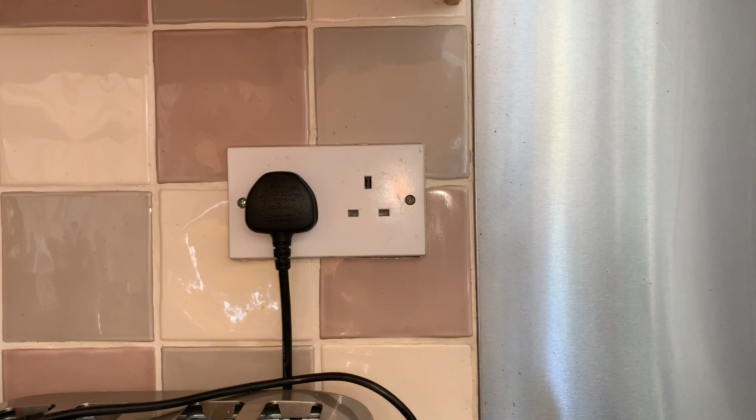First of all, we find a live supply which we know is working. This is a live supply, there's no switch on there. I'm now going to switch on and test to make sure this is working. You can see that's picking up the live, the neutral, that's the earth, that's the live, that's the neutral. So we know now it's working.

So we can go to all the appliances. The hob is just in front of us here, which is metal, so we could get electrocuted. We can now check and see whether we get electrocuted from that, which no, and now we need to check and make sure this is still working, which it is.

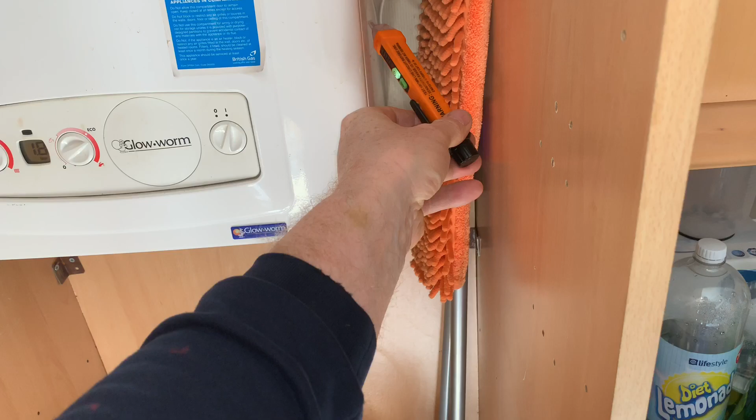Across from the kitchen we've got a boiler, so we can now check the boiler. That's not picking anything up, that was just me doing that. Okay, we can now go back to our known supply and check again.

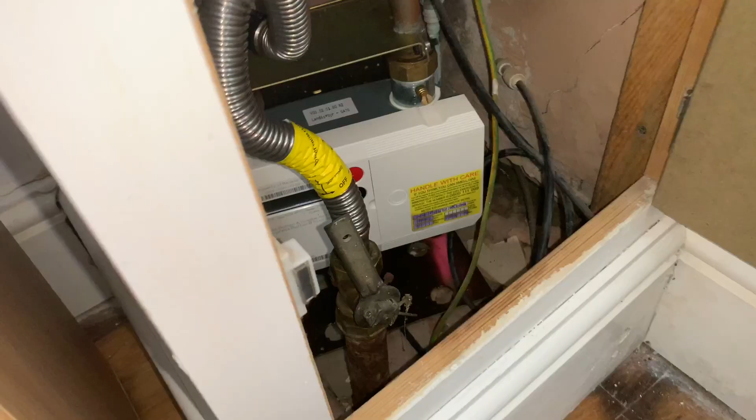The last appliance we've got in the living room is the fire, which I don't think you ever get an electric shock from, but you never know. So we now need to go back to a supply to check - and that's working. Now we need to go to the gas meter to check it.

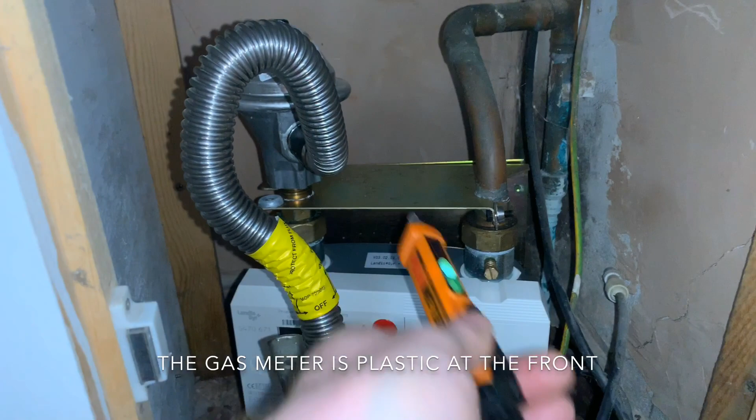That's plastic, that's not going to beep. So we can now see we've got no power there. We need to check again. Now we know we're safe to touch everything.

The first thing we're going to do is a visual inspection of the meter. We're looking for: is there a bracket and is this meter secured? Have the shear bolts been sheared on the anti-tamper devices? Does the ECV fall to off? Are there labels on the meter and on the anaconda? Is the anaconda not stretched? Are there no signs of corrosion? And is the earth bonding to the correct regs?

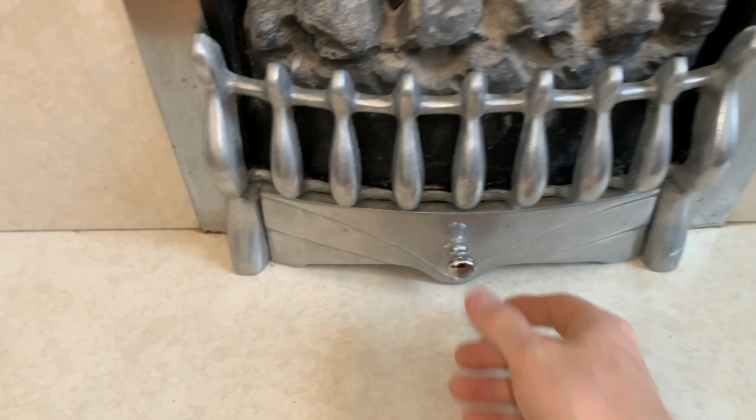Now the first thing we need to do is make sure the appliances work before we even turn the gas off. So let's try this fire first - let's remove the cover and expose the igniter. Well, that didn't ignite. Looks like the igniter doesn't work. No, the igniter's not sparking, and that looks in pretty poor condition, so it's a good job we're servicing it.

So first of all, that doesn't work. Let's go and try the hob. Okay, there's the hob, let's give it a try. Well, at least we know we've got gas. Okay, so that's all working.

Ignition works - we need to do all the rest of the checks, but we're just checking to make sure they work. Next, let's go to a hot tap and turn it on to see if the boiler fires up, which it has done. So the boiler works. Okay, time clock and stuff - can't see a time clock anywhere, so we'll have to look at that. But at least the boiler comes on, that's the main thing.

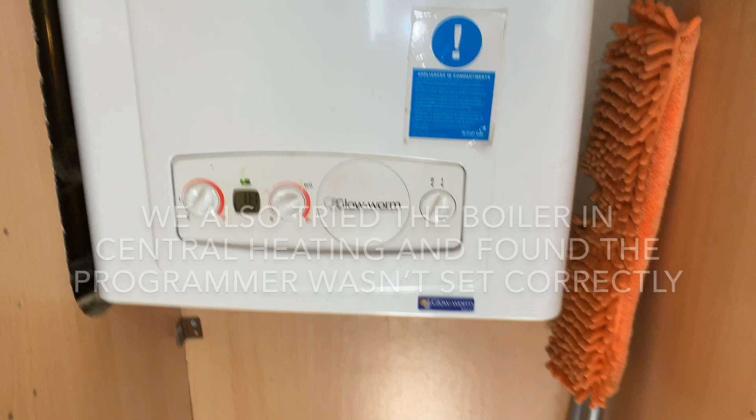Okay, so we'll go through the service procedures for all the different appliances now.

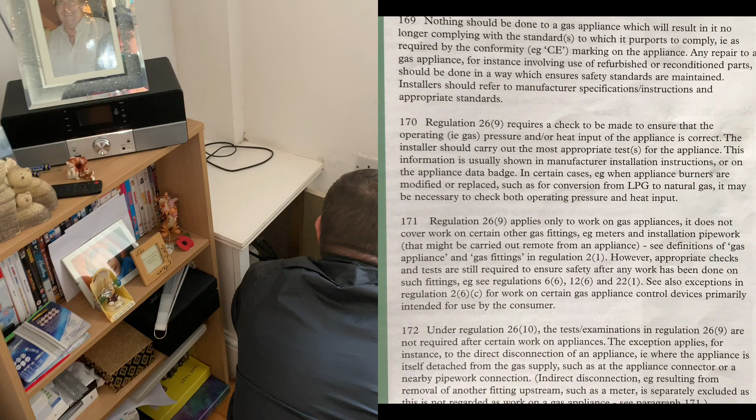According to regulation 26.9 of the Gas Safety (Installation and Use) Regulations, we don't need to carry out a tightness test when servicing, but we've got trainees here and we always carry out a tightness test. Mark has done his visuals on the meter, noted all his faults, and he's now carrying out the tightness test procedure. We'll do a tightness test before and after, so we know there are no leaks before we work and no leaks after. Even though the regulation says we don't need to do one, we are doing them. So that's the end of the tightness test, and as you can see from the results, there's no leak.

So first thing we're going to do now, we know this fire's ignition isn't working. I'm going to take the coals off and have a look to see if it's actually sparking. Then we're going to strip it, do a flue flow test, do an inspection inside, put it all back together again, and then do all our commissioning tests.

Okay, so we're going to start taking them off. These are the fuel bed, the artificial coals. They're in pretty poor condition, so we'll be cleaning them up. We haven't got the manufacturer's instructions, so I'm going to have to download them. First thing we're going to do now is take pictures of where the coals are, so we can use those pictures to help us put the coals back, even though I know they're in the wrong place. The guys are going to come in, take pictures now, and then we're going to carry on.

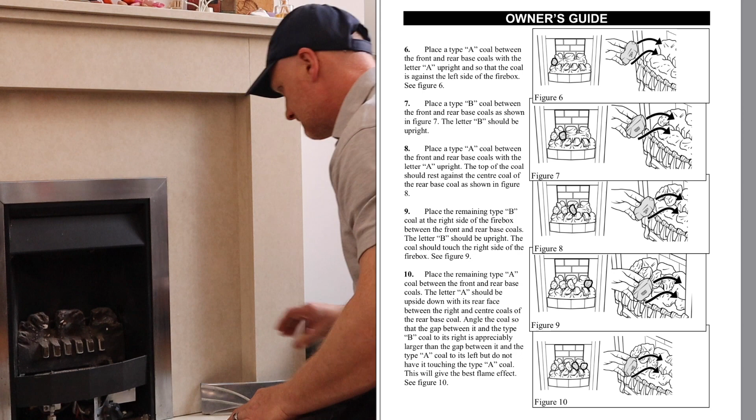Oh, the ignition is sparking now. So what I'm going to do now is put the gas back on and see why this actually isn't coming on. Let's do that now.

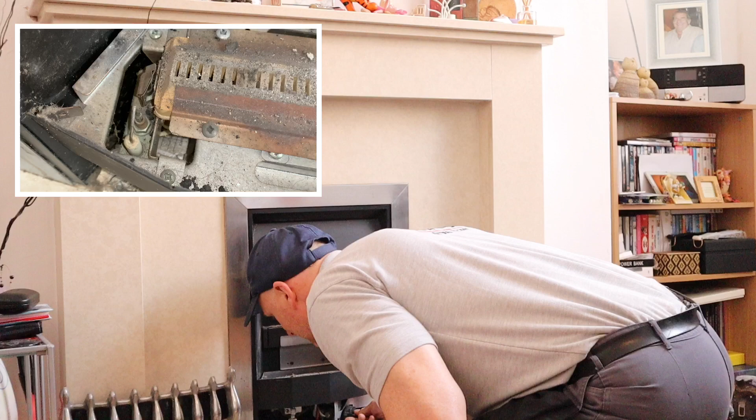I can't actually hear any gas coming out. Oh yeah, we've got gas coming out, but it's pretty rubbish, it all needs cleaning up. What I've found is the injectors are all full of muck, the whole burner is full of muck. So we're going to take the burner out, clean it up, and hopefully test and get it up and running. But it is sparking and it is lighting, the flame is just incredibly small.

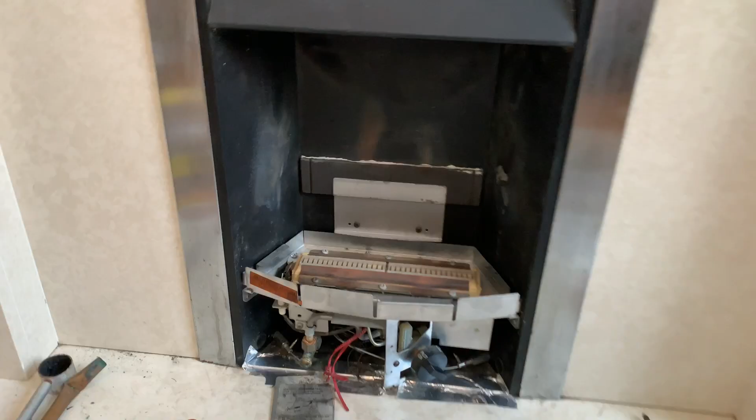While the trainees are out cleaning all the stuff up, what they haven't realised is all the fire shields are broken and missing. So we've done all this work for nothing, and none of them have spotted it yet. I'm just waiting to see which one of them actually spots that we can't keep this fire on because everything's broken on it, so we'll be at risk with this fire. Filling the warning notice in, putting the stickers on, but none of the guys have noticed yet. To be fair, it's been me doing most of it and they've not had a really good look yet, so they're off cleaning all the coals up and everything.

They've downloaded all the instructions, so let's see what happens. Now what we're going to do is disconnect the gas supply here to get the tray out.

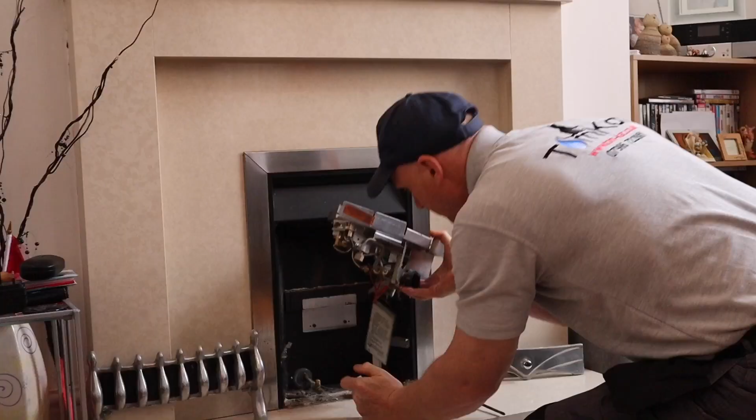That went a bit tight and a bit crusty. That's the gas connection undone, just a Phillips screw here which we don't want to lose. That's the tray out - oops, that's all melted on. Don't want to lose that screw. So that's the state of the tray, it's in poor condition, so the guys are going to give that a good cleaning up now and take it off.

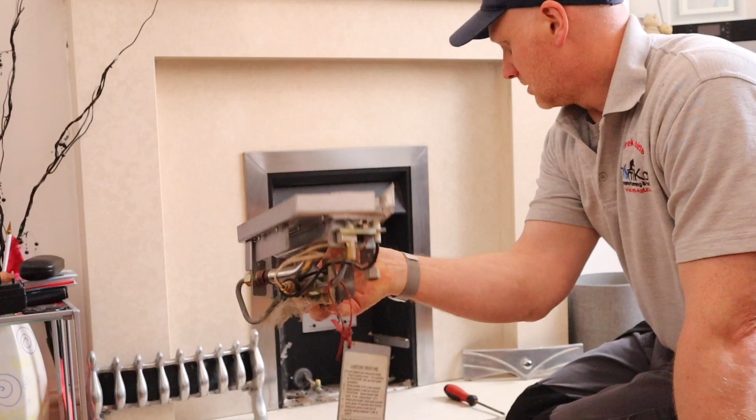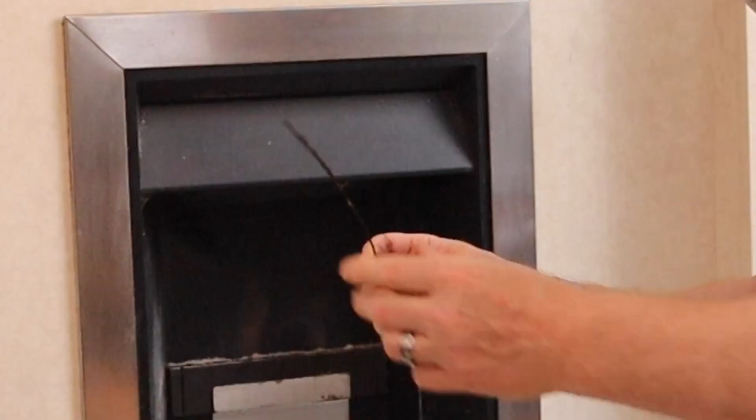So the next thing we're going to do now is actually remove the firebox. They're pretty stuck on there, but it's held on with two cables here. Now it's very important with these cables that they're in good condition, which these aren't, so you should never ever poke them back through the fire opening - you should curl them up. Because what happens is they rot on the end, like this one has, and that's going to cause us problems when we come to taking it off and putting it back on. So it's just a matter of undoing these two clamps and taking them off. It has come off, that's a good thing.

Now we shouldn't have to, you can see there where it's all corroded now, that's causing us the problems getting it out. Oh, got it out in the end. Now, this tape is just holding the bottom in, so we'll replace that tape later.

Okay, now what we should do is come forward. Now we've never seen inside this fire before, so the guys are going to take the pictures now, taking off the cables. I'm now going to show us a video around the back. This is how we're finding this fire.

Okay, now this customer has only just moved into this house. This is why they're asking us to do these checks. Okay, so let's get on with it. So this is how we've found this fire.

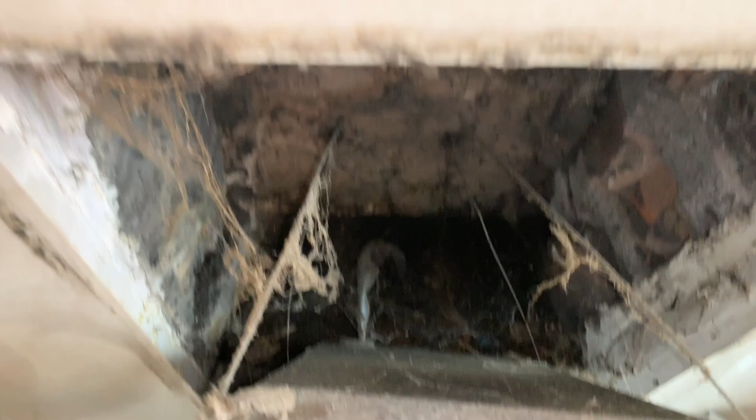So if we look down, ooh, look at that. And this is what we've come across, what we've come into. Okay, so this hasn't been serviced for a while, has it? So let's get this out, let's get it cleaned up and let's get on with it. So this is what we've found.

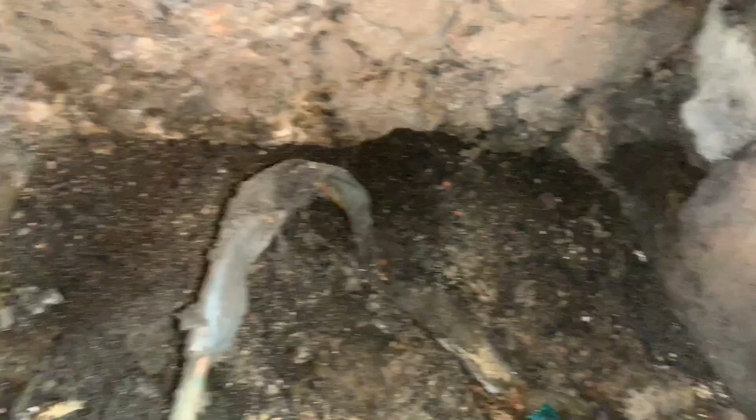All the debris in the bottom. We've got to check and make sure it's sealed all around, which it seems to be. Okay, we need to have a look up that chimney, see what we've got there. Down the sides. One of the things I have seen is it doesn't seem to be sealed there.

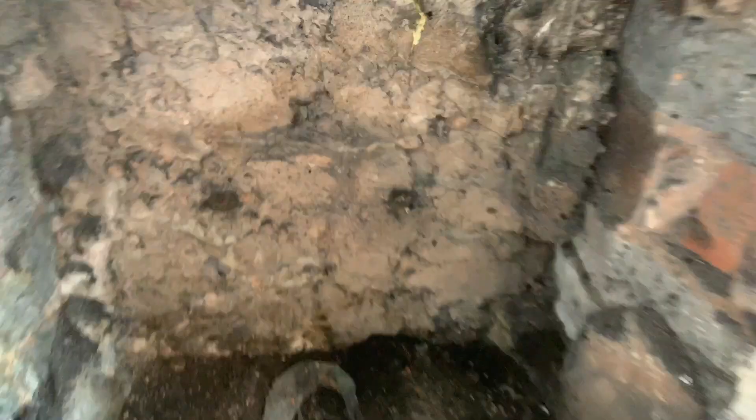Okay, gas pipe needs reprotecting because that's all come off. We need a good clean up and get rid of all those spiders' webs, and then we need to have a look up the chimney.

Okay, so we've cleaned up and retaped the gas pipe. We've cleaned out the bottom. Now we have a massive big hole here, which we're going to have to fill in. We're just mixing some sand and cement now. And we need to check and see what the state of the chimney is up here. So that's the next thing we're going to be doing.

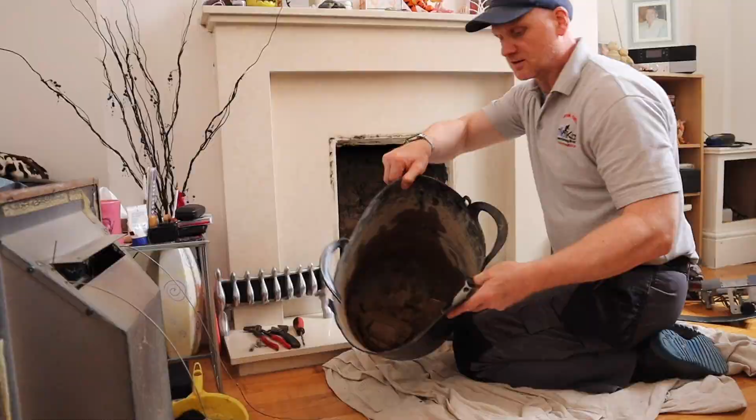Okay, so Sal's mixed a great mix, a dry mix for us, so we can fill in this big, massive hole here. So that's the next thing we're going to do, is get this sand and cement in, get the hole filled in, get a flue flow test on, get it all back together again, get the spillage test done, get it all commissioned.

Now you can see we have now completely sealed the bottom. All the sides have been sealed. We've checked all the top. We're now going to carry out our flue flow test.

Okay, now we're going to do a flue flow test. Now if you look at our flue flow test and spillage videos which we've released, it goes through all the procedure. We're going to warm this flue up first, for 5 minutes. We're then going to try with a match, and then we're going to try the bomb. After that, we're going to go around the house and check the route of the flue. We're going to go into the loft and outside. We might be doing this 3 or 4 times. So let's get this flue warmed up.

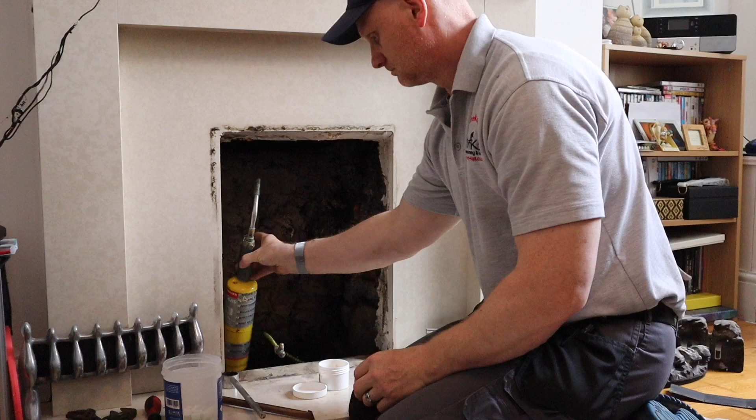Okay, the flue's been warming up now for 5 minutes, so I'm just going to see if we've got a pull by just using a smoke match.

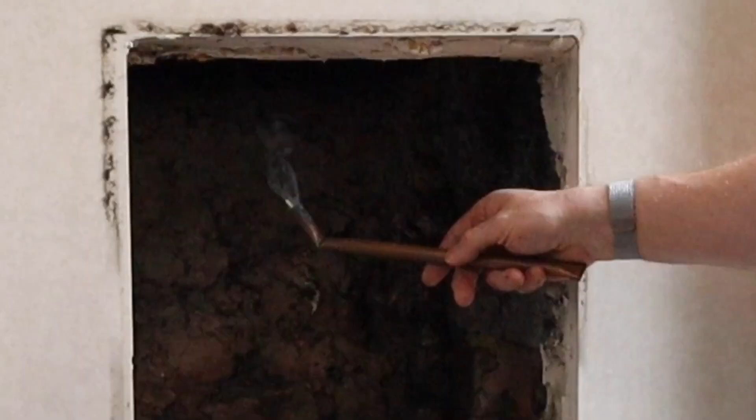So you can see there's a good pull, so we can now try a bomb. Remember, 5 metres cubed over 30 seconds, if you've seen our other videos on flue flow test and spillage. So we're going to do this one. The guys are all going to do theirs, and then we're going to look around the house. We're going to go in the loft, in the bedrooms, and outside. So let's try it now.

Was it 5 metres cubed over how many minutes? 5 metres cubed over 30 seconds. That's what one bomb does anyway, isn't it? Yeah, 5 metres cubed of smoke. That's pretty well, that. So you can see it actually is pulling.

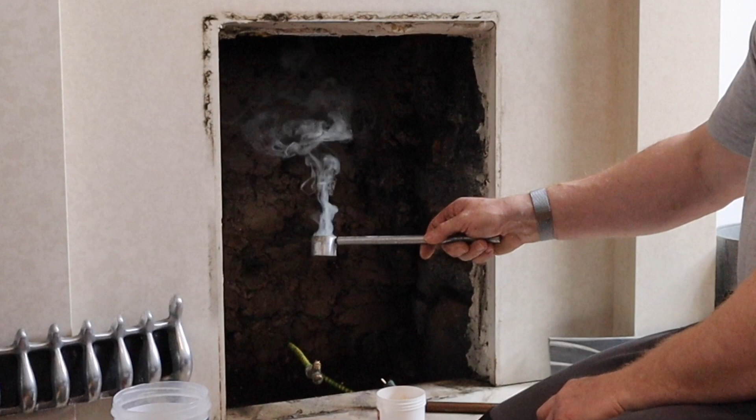Getting a bit carried away now. But you can still see it draw it back in. Should I go outside and check?

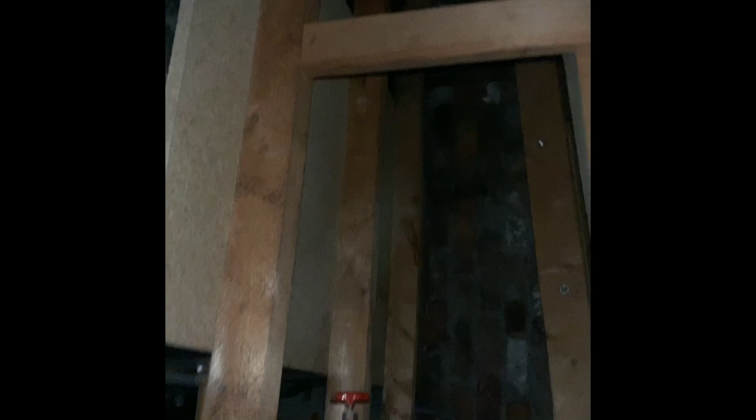Okay, let's go and check the route of the flue and see if we can see any smoke. Okay, we're in the loft. You can't see any smoke in the loft. You can only just about see the chimney at the back there. We've inspected it, there isn't any smoke in here, so that's looking good. We've checked the bedrooms, everything's fine.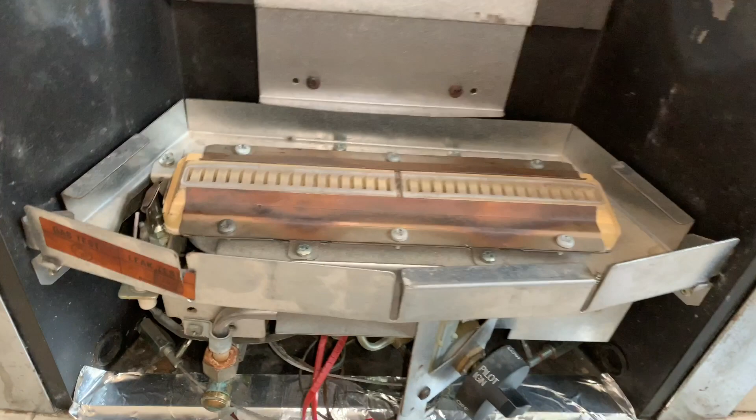Okay, the moment of truth. We just purged this through, got rid of all the air. We're just going to light it now and see if this pilot actually works.

Hey, that's a good start. Now will it keep the burner on? Oh, look at that. So let's get these coals back. We've downloaded the manufacturer's instructions, and then let's do all the rest of the tests.

Coals are now on, according to the manufacturer's instructions. They've brought it back all cleaned up. So let's get the tests done.

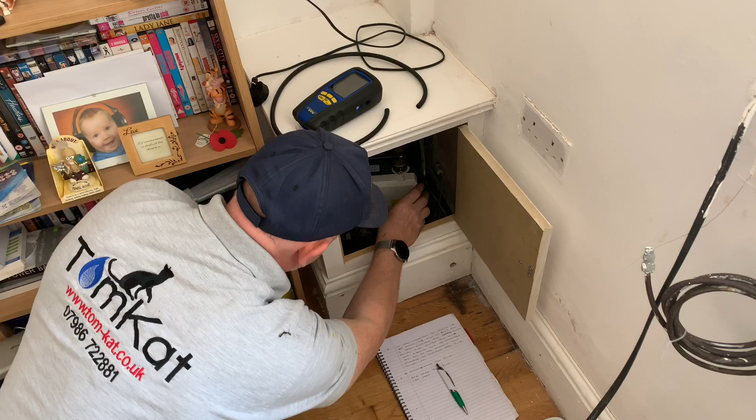Okay, so I'm going to show you now how to gas rate using this E6 meter with the red and black buttons. First thing we need to do is wake the meter up by pressing the red button. Once it wakes up, we've got the index, and we can press the black button and start the stopwatch at the same time. So you ready, Sal? Yep. Go. So I'm just waiting for the reading now.

The reading is 6.543. So I'm going to wait 2 minutes now while the gas rating is firing, and let's see what it comes out at. Tell me when it's 2 minutes.

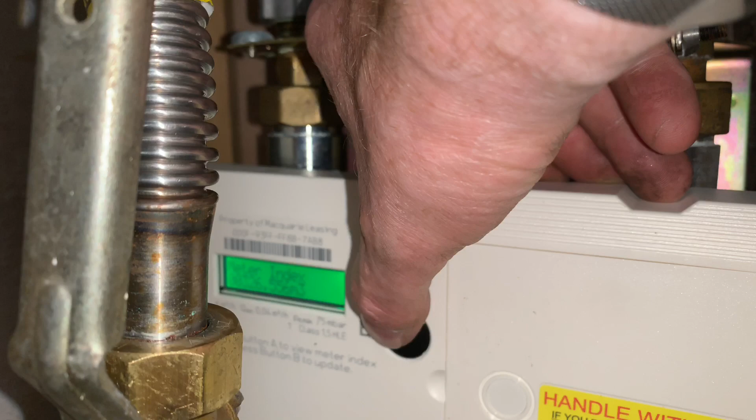It is now. Okay, so that's 2 minutes up, and we're now on 6.556. So that's our second reading.

Let's have a look at this gas rate. So this was our first reading, 6.543, and this was our second reading, 6.556, and that was over 2 minutes, okay? So 6.556 minus 6.543 is 0.013 meters cubed, but that's only for 2 minutes. We need an hour, so 0.013 times 30 is 0.39 meters cubed an hour.

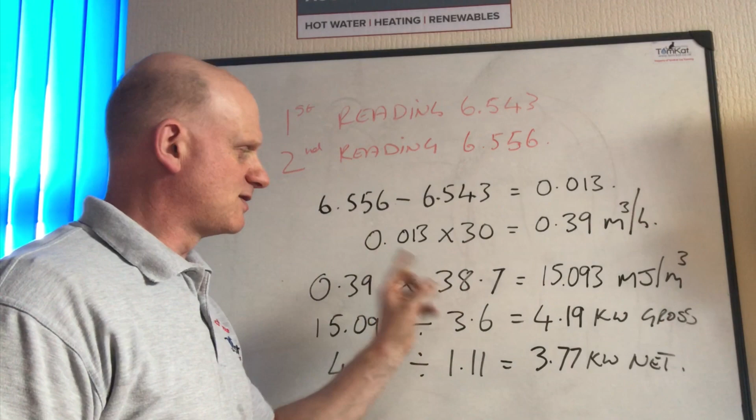We need to turn meters cubed an hour into kilowatts, so we do 0.39 times 38.7. The 38.7 is the calorific value of gas, what energy we've got in there at the moment. That could change, but hasn't changed for a while. Gives us 15.093, and that's megajoules per meters cubed. We then do 15.093 divided by 3.6. The reason why we do 3.6 is there are 3.6 megajoules in a kilowatt, and it gives us 4.19 kilowatts gross. We need to turn it into net, so we do 4.19 divided by 1.11, gives us a total of 3.77 kilowatts net.

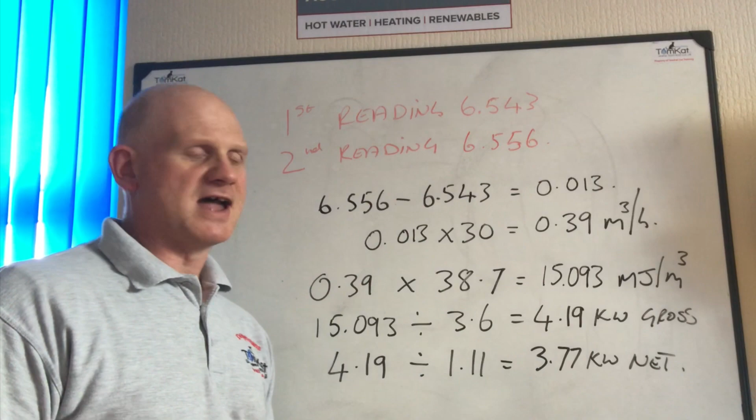Now, the manufacturer's data badge actually said it was 6 kilowatts gross, so we didn't really need to do the 1.11. But that's what this turned out to on the gas rate, which made it undergassed. That was mainly because it had the 8 and 10 mil pipe coming all the way from the gas meter.

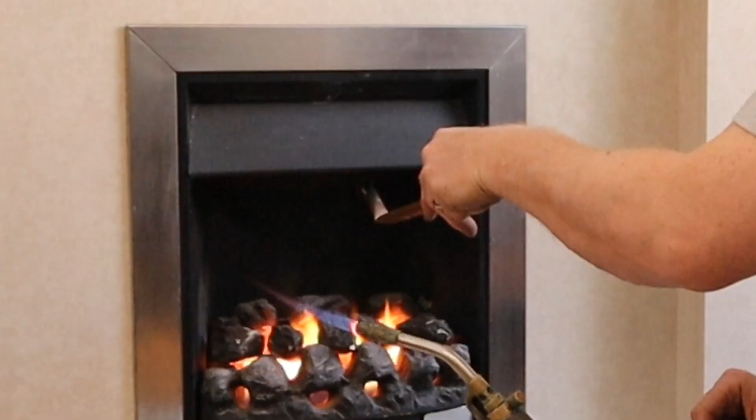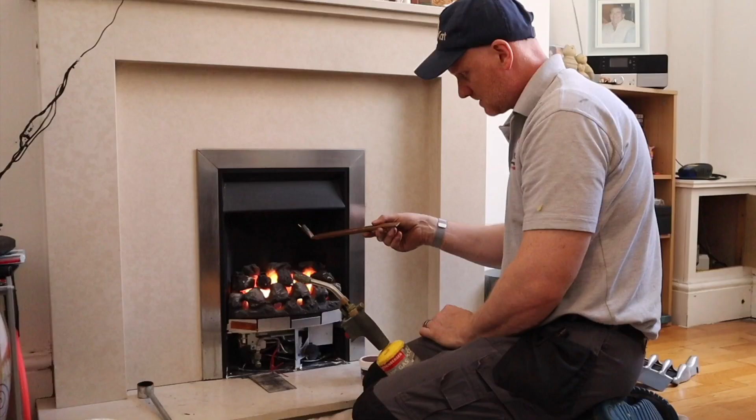That's gas rating. We're just going to do a spillage test, and then we're going to look at doing the burner pressure. So I've gone through what the manufacturer says, and it says to hold it down. Okay, looks like it passed to me.

Let's sum up about this fire. This shows the importance of having gas appliances checked every 12 months, and especially if you are buying a new house, to have your gas appliances checked before you move in.

So the things we've found with this is, there's 10mm pipe, well it's 8mm actually, goes all the way to the gas meter here, okay? So when we gas rated it, it came out at 3.77 kilowatts net. What was it gross? Because it says 4.19, because it said 6 kilowatts, so we've not got enough gas to go into it, but our burner pressure was spot on.

Okay, now the biggest problem with this fire is there is no fire retardant stuff here. The protecting shield for the back is missing on the sides and the back and the top, and this is showing signs of damage.

Okay, but it's passed the flue flow test, it's passed the spillage test. So technically, are we classifying it as at risk or ID? Now, signs of scorching or damage is at risk. Okay, it's a heat shield, so it's at risk. Because it's passed its flue flow test and spillage, that doesn't make it ID. It is undergassed as well, so are we going to class that as ID?

Don't know about that connection there - it's not leaking gas. I've never seen a hob connected that way, but at least it's not a cooker hose or a tap connector, and it's got an isolation point. It's passed the tightness test. So is that accessible? Well, the manufacturer gives you a compression fitting anyway, so we've got to deem that acceptable. So we can get all the information now off our data badge, and we can commission the appliance.

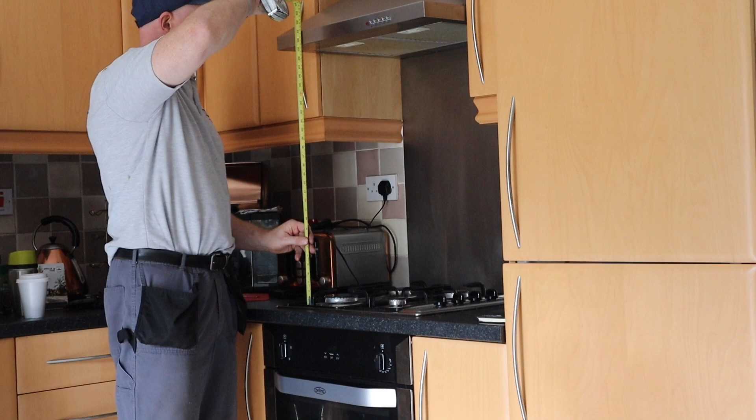Now we've done the gas rate - I've just measured here, and this is 750. Normally a hob needs to be 760 from combustible material. This isn't combustible. So we've checked under here, there's no scorching.

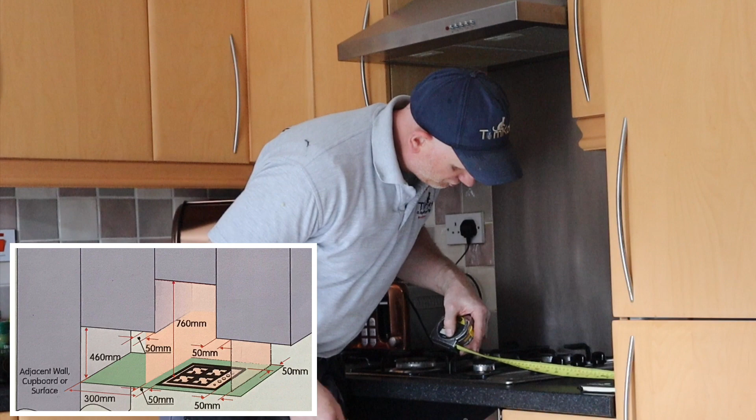We've got 45mm at the back, but it should be 50 - but this is metal, and it says 45 is okay if there's tile or a splashback. We need to be 300 from the side here according to the manufacturers, and we're at 310, so we're okay on that. This seems to be installed in the right place.

Last appliance to look at in this property, we're going to be looking at this boiler. This is a Glowworm CXI combination boiler. One thing you never do with these is turn the main power off, because a lot of the time the board goes - we used to have these at the centre and the board went on them all the time. So we're going to be careful when we're servicing this.

Now, we're not going to be completely stripping this because we're going to flue gas analyse it first, and if the flue gas analyzer readings comes up wrong, then we're going to have to make another appointment to come in and sort it out.

Okay, we're just basically doing checks at the moment, kind of servicing, but we're not doing a full strip down service. We're not taking the burner out because I didn't know what appliances were coming across. I asked them what boiler they had and they said it was a white one. I asked them to take a picture of it and they took a picture like that.

So this is what we're dealing with. We're going to take the cover off, check inside, make sure there's no leaks. It's topped up to 1.7 bar, so at least we don't have to fill it up. And we're going to do a good visual inspection inside the combustion chamber, so let's get on with that.

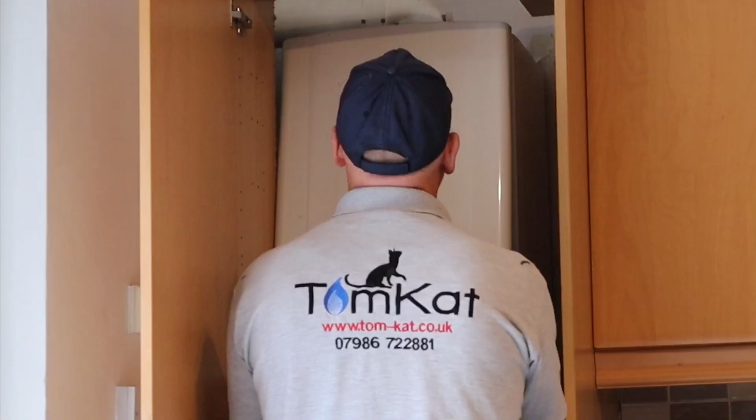Now, according to this sticker, it's had its seal replaced, but whoever serviced it couldn't be bothered putting the date on, so we've got no clue when it was changed. If you do change the seal on one of these boilers, you do get a sticker. At least put the date on so the next engineer knows what's going on.

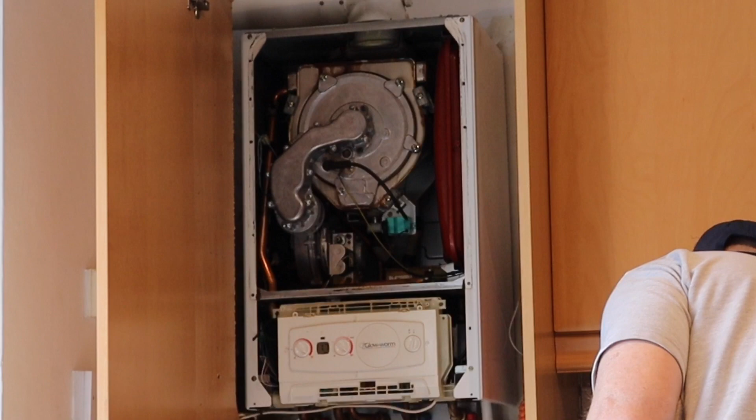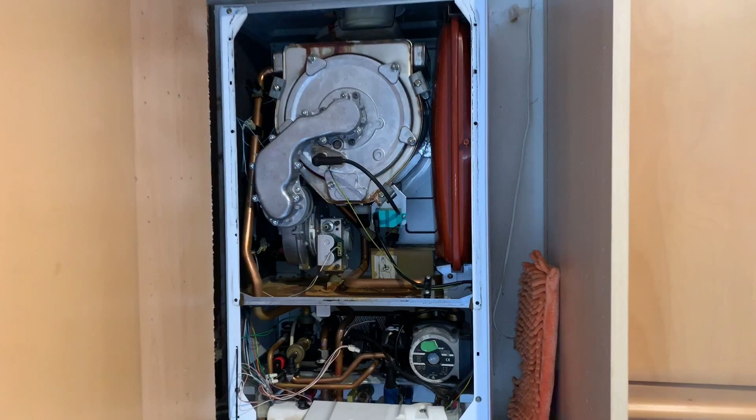Now, this is in a pretty bad condition. Let's have a closer look. So we're taking the covers off now. Let's look inside a bit more closely. And we've got signs of it having been leaking in the past. I don't think... no, it's all dry. It's all dry.

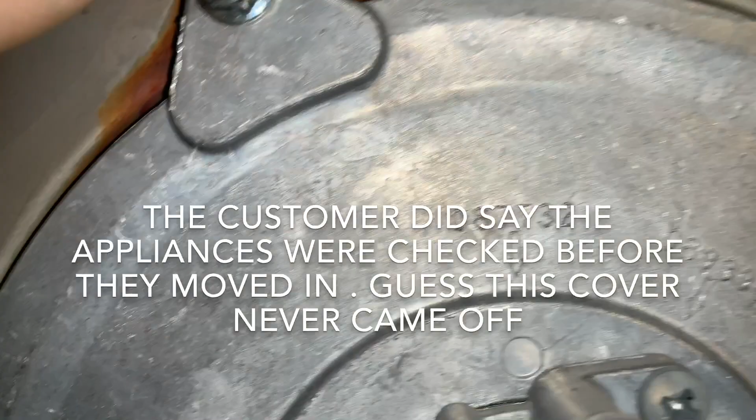What the hell's going on here? So that's not wet. But you can see something has been leaking at the top. I'm sure our tests will show whether the seals have gone on it. But I'm going to be sticking a screwdriver in there, see if it goes straight through. But something was leaking at the top by the looks of it, possibly the flue. Okay, so we'll have a look, see what we can find. But at the moment, it's not looking good, this.

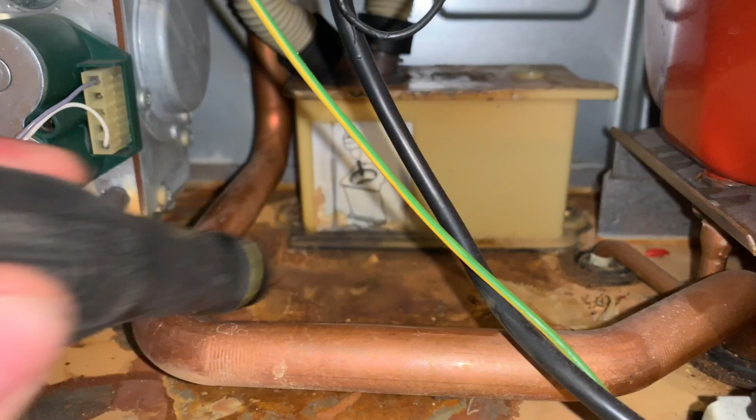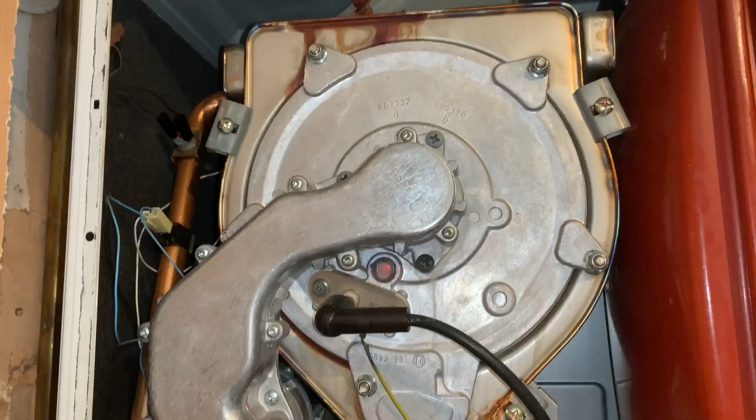I've just got the appliance up and running now, so while the guys are off gas rating, I'm just going to check and make sure nothing's leaking, or if I can see anything leaking while it's running. I can't feel anything around the combustion seal. This is all dry, so I'm assuming it's an old leak. Can't see any signs of anything new.

This is the problem, isn't it? You're guessing when you get here. Why is it in such a bad state, and why are we guessing?

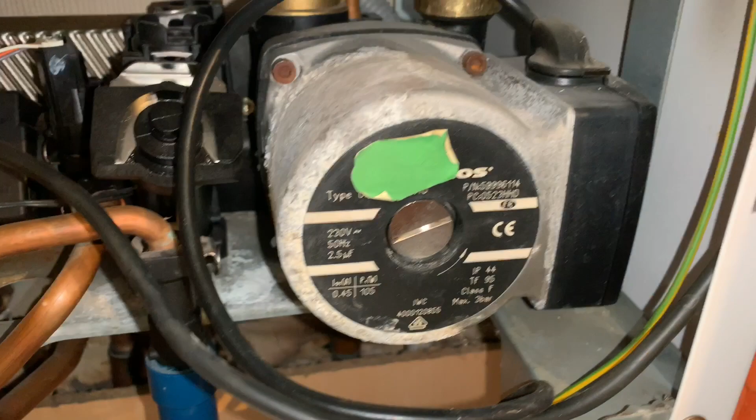Okay, looks in pretty bad condition. There doesn't seem to be any water leaks down at the bottom. So we'll just keep looking and keep testing, see what we come up with.

This is the top of the boiler. This is where we're going to be doing our flue integrity test to see if the flue is leaking. This is where we're going to be doing our analyzer readings. So we're just looking to see.

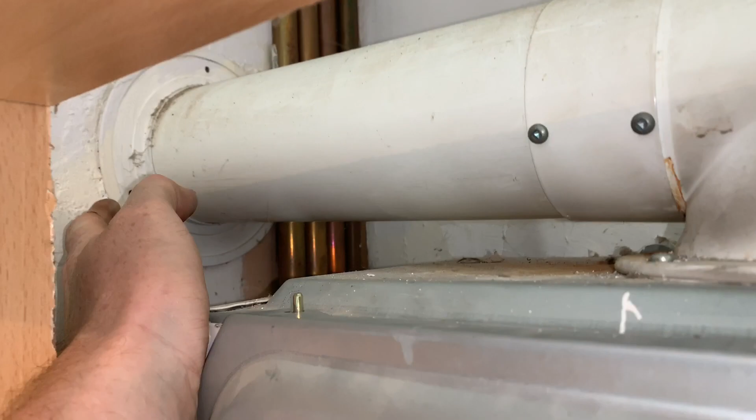Okay, so that to me looks like it's the seal that's been leaking, but I don't know whether it's been repaired, because it's not leaking now. We'll soon find out when we do our integrity test. So while we're here, can we see whether it's sealed? I can't even get my hand in. It's siliconed, so that's all siliconed up.

Let's have a look at the flue outside. That could be one of the reasons why we've got water coming back. You see why they've done that, because it's too close to the boundary, but why have they gone so high?

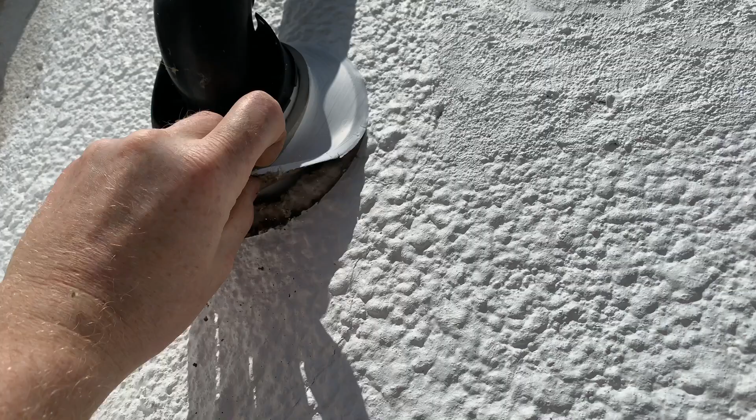At least it's sealed. Is it sealed on the outside? Oh no, it's got the factory seal, but they haven't actually sealed it. So while we've got our sand and cement, we might as well seal that as well. Very interesting.

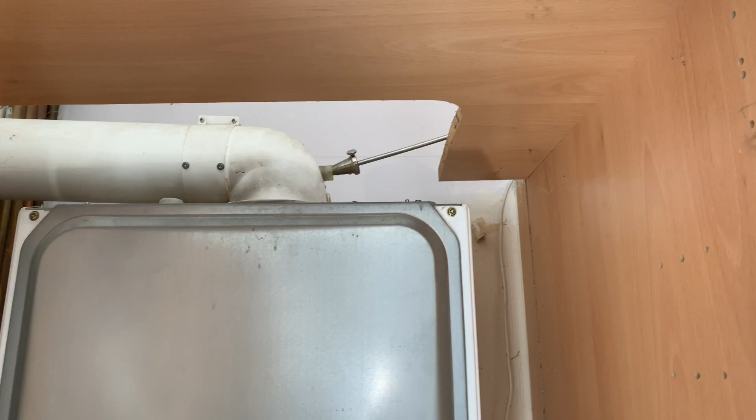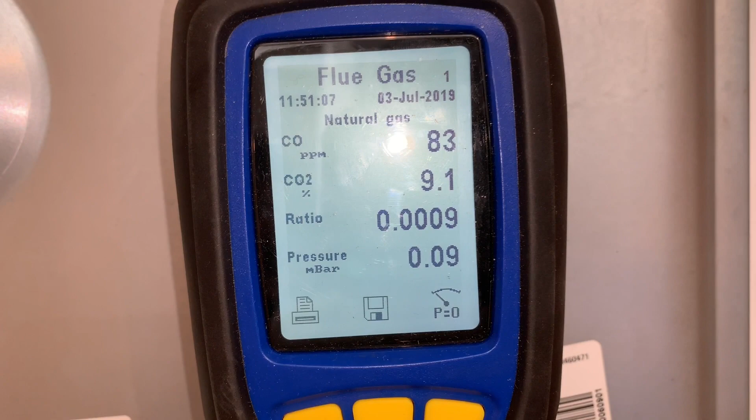Okay, so we're now analysing on maximum hot water. This boiler doesn't actually have a test menu to be able to put it in high and low. So we're looking for a CO2 of, technically, between 8.2 and 10.2, and we've got 9.1. Now, this is looking pretty good on the analyzer readings on maximum.

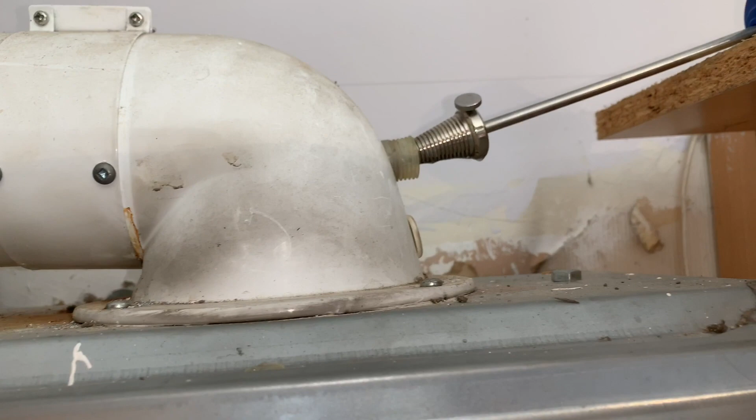So, flue gas analysing, minimum of 15 minutes for analysing until you get a stable reading, to a maximum of 30. So we could just about get the probe in. These are the way the cover's been made. So we're just going to leave it a little bit longer and see what it comes out at while the guys take all the pictures.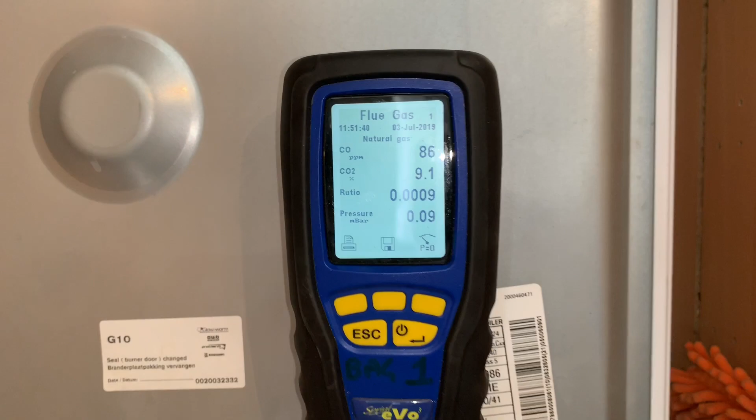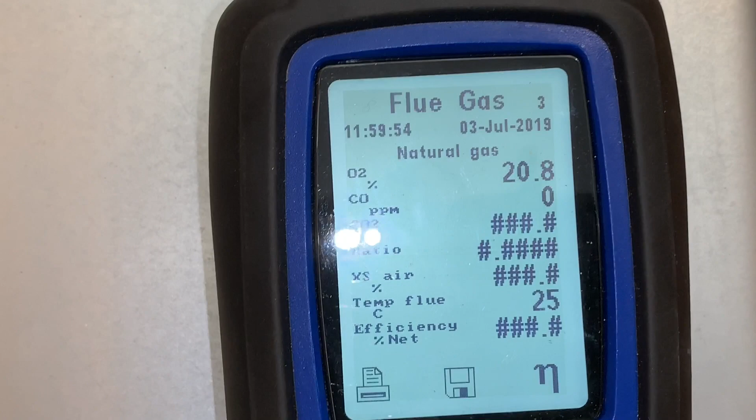So I'm trying to see inside the flue, to see if it's rotten. The flue integrity test has passed, but it looks rotten to me. We're looking for an oxygen reading of greater than 20.6, which we've got, and a CO2 of less than 0.2, which we've got, and no ratio whatsoever. So this is what we've had to do to get onto the flue integrity test - we've pushed that right inside the flue so it's sampling in there. Those readings are passing, but what I've just seen outside, I think this flue needs replacing.

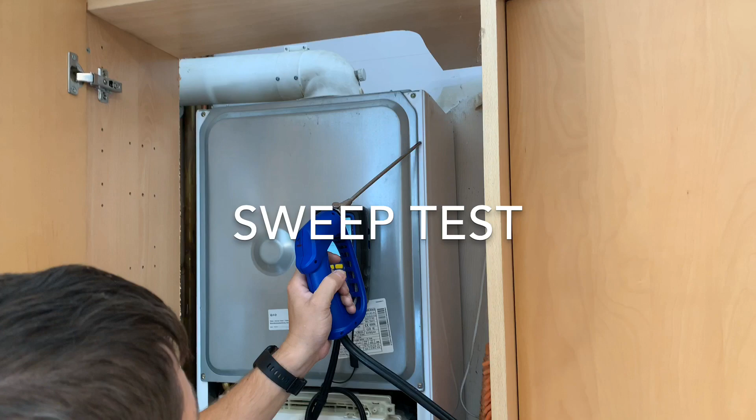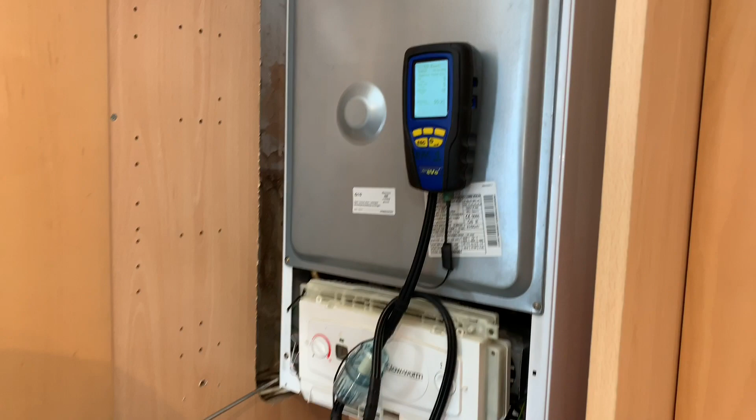Now this test, what Mark is doing now, is called the sweep test. We've got the analyzer set on sweep test mode. He's going to do this for 2 minutes, looking to see if we get any CO coming into the room, so carbon monoxide. We need less than 10 parts per million, but as a guide, if we get more than 3 parts per million we need to investigate. He's going to pay particular attention to the top here where the flue is, to see if we're getting any products of combustion coming back into the room, especially where that seal looks like it was leaking.

So it's passing all its tests, but that flue is in poor condition and is going to need replacing.

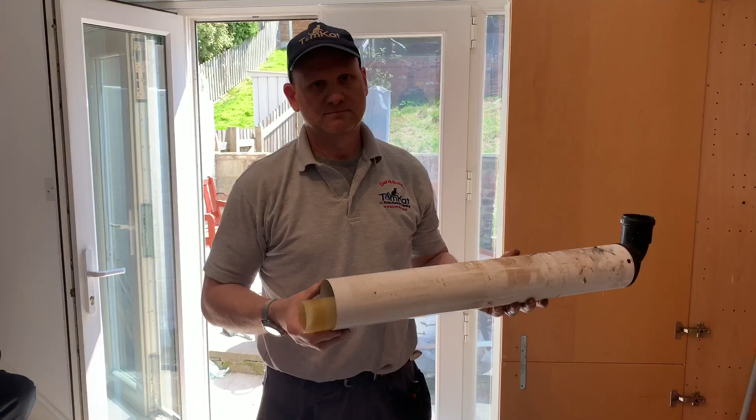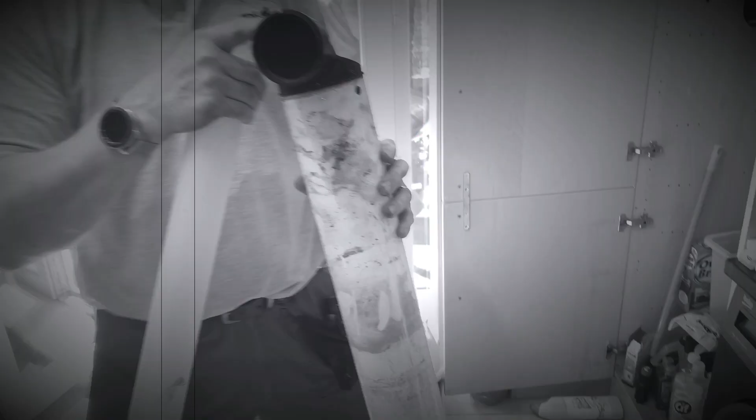So this is what we found. We take the flue off - it wasn't actually connected. You can see inside, the flue started to corrode. It's gone funny here where it started to rot through, and it's because when they put the plume kit on, they didn't connect it properly. So this flue is ruined.

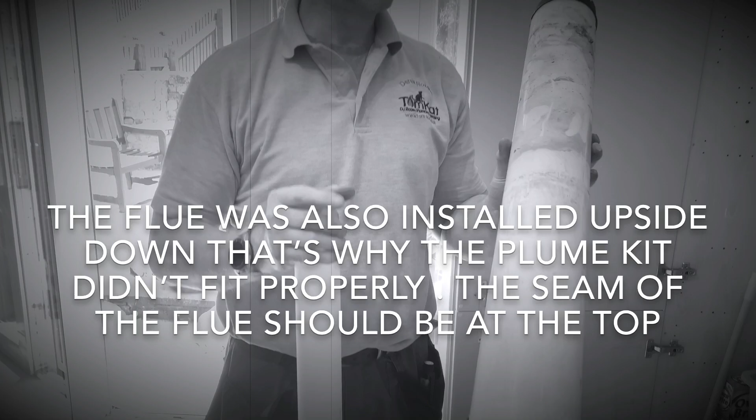And this is what the problem was - it was coming through there and then dripping inside. So while they haven't had the heating on, I don't know how long it's been off, the customers aren't here, that's been the problem.

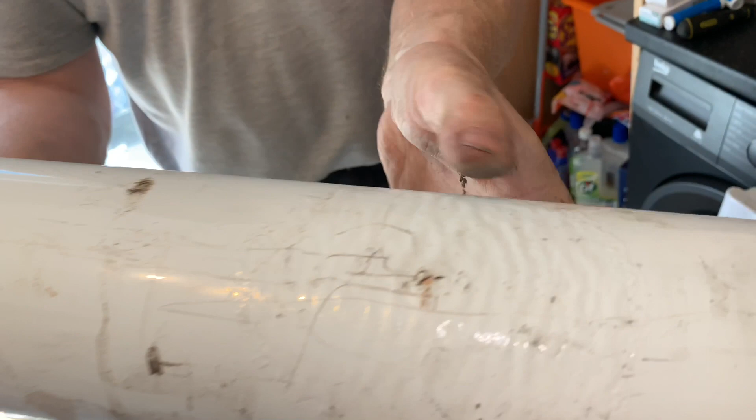So whoever originally fitted this boiler - this is quite an old boiler, it's a 05, so 2005 - but you can see how it's rotted through. Now we're taking it out. You can see that. So this needs replacing.

Well, I'm a lucky chap - managed to get hold of a brand new replacement flue to get rid of our rubbishy one. And another thing I've just found out is it's exactly the same length, so I don't even need to cut it down. So let's get it back where it belongs.

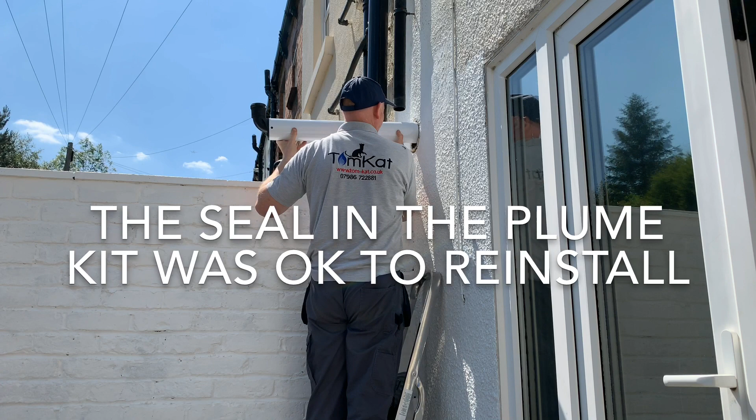So now I'm going to install this replacement flue. First of all, I'm putting on the manufacturer's cover for the flue, which goes against the wall and the flue to make it look nice. I am going to be sanding and cementing it up, making sure that it goes full socket into the elbow.

Now there is no seal on the outside flue where the air comes in, just this securing clamp, which does need to be secured with 2 screws according to the manufacturer. So I'm just getting it in line with the old original hole in the flue elbow before I drill the hole now and put the screw into the new part of the flue.

Next I'm going to be sand and cementing up the hole, using a stiff mix so it doesn't all fall out. New rules say it has to be sealed on the inside and the outside, which I'm now doing, making sure it's all the way around, and then I can put the collar back against the wall to make it look a bit prettier. Just cleaning up the excess.

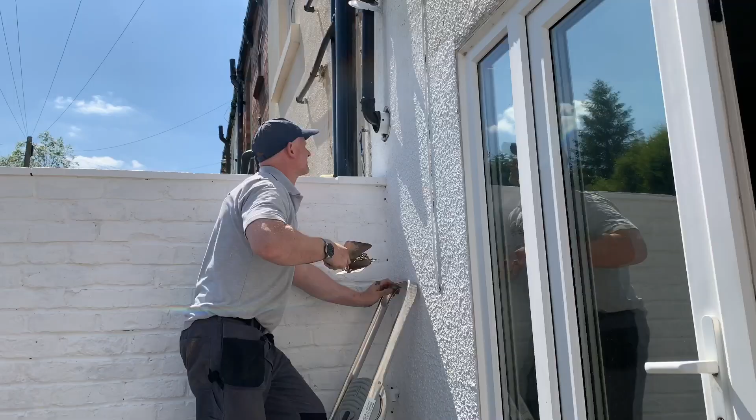Now on the outside again, I am sealing the outside with sand and cement, and then I can put the manufacturer's seal back around that to make that look neater. And the job's now complete.